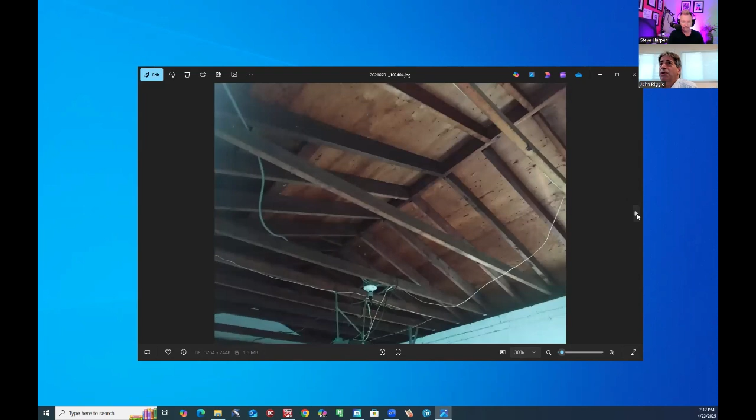And now, in that challenge, I'm just curious, John, was there any way to get a variance for that from the town? I mean, sometimes you have to pay something for it. Was there any way to get around that, or it wasn't even a goal for you and the homeowners? Well, the borough here is sort of strict with the setbacks, and on this particular project, they didn't allow any variance at all. There were only some things as we went through the architectural review on the house that they might have allowed, but almost all the setbacks are within the new standards they have.

So this house overall started off as an idea of an addition, and as the job got bigger and bigger, the whole house is considered really a new house. It goes under the new code.

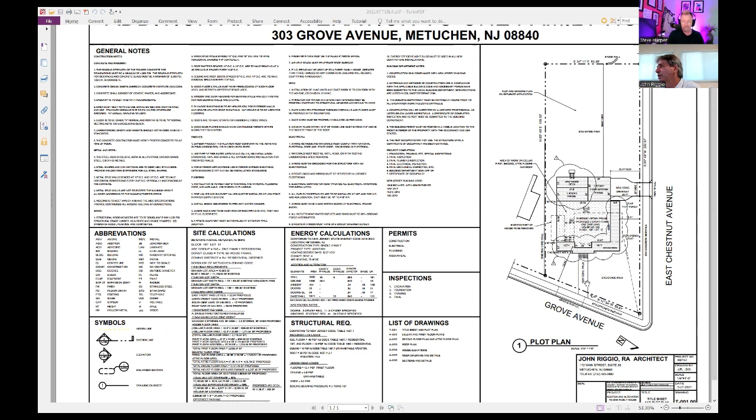I went through a number of designs, and here in the Borough of Metuchen, since the project went past a certain percentage - over 50% - it started to be considered a new house. So all the things with the setbacks, I think on the title sheet you can see the plot plan, and if you look at the plot plan here, you can see that the existing garage was too close to the side yard.

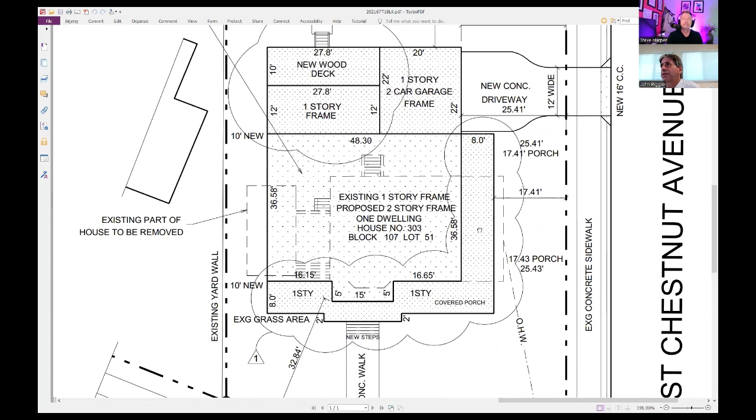And also the existing brick addition on this side of the house over here was also too close. So to bring this within the requirements of the zoning code here, the small addition had to get removed. The old garage and breezeway are completely removed, and the foundation area - the rest of it is in use, but we added on to the overall size of the house.

This front area that's shaded in is one interesting feature of the zoning code here, and that is a covered porch. This gives you an extra 8 feet within the setback of the front yard, and you can also utilize that space. So that's one bonus they have here. There's a requirement of keeping the garage behind the line of the porch. So the idea is you use the porch, keep the garage to the back, 8 feet behind the line of the covered porch, and that meets the zoning code here. There was plenty of room in the back of this property - it was very large.

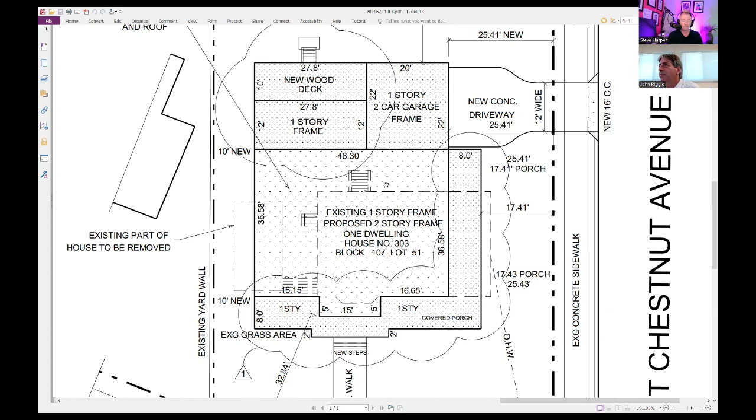And from there, we added a couple additions. One was to add a two-car garage with a new driveway, and an addition to have a larger kitchen area, which I'll show in the pictures, and then a wood deck too - so there's a very nice wood deck there. And then in the front of the house, we made an entrance right from the sidewalk, and the old curb cut for the garage and everything is completely removed.

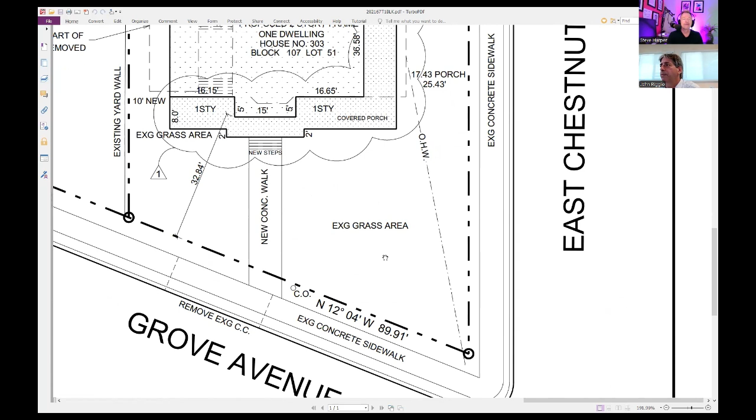So, John, I want to ask, looking at these plans - they're fantastic, so much detail, very easy to read.

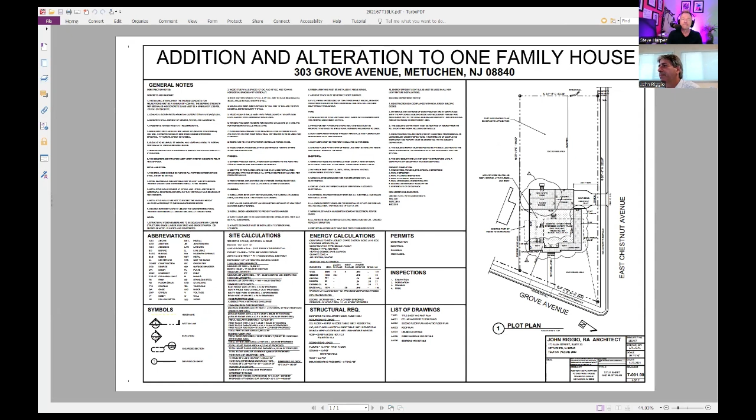There's sort of a best description, like clouds, a drawing of a cloud, circles around certain things, like the front of the house and the back of the house. Oh yes, those are revisions as the house was constructed. Small adjustments were made to the property, and I put them on a revision.

So that's to call your attention to a revision, and the revisions you're talking about are the ones made to your modifications. Yes. Gotcha, okay, interesting.

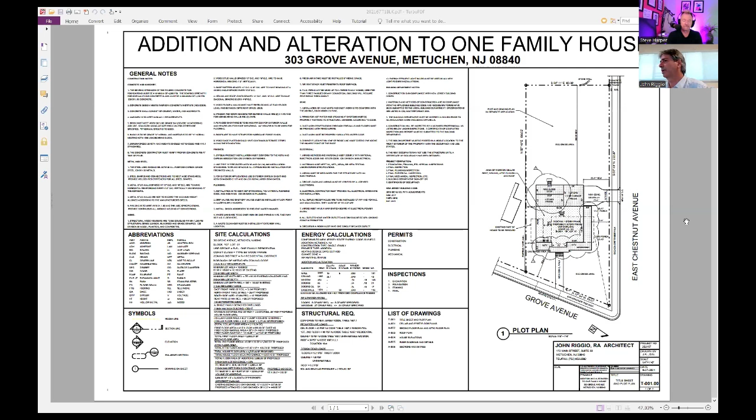From this, let me get the next sheet of paper on this here. Let me just get it on this sheet. Okay good, so this is screen one. Let me see if I can get the next drawing on here. I have to open up that file again, takes two seconds to do. I'm gonna go in and get the folder for this. So the drawings consist of seven drawings, and I'll get the floor plans in a minute.

How long did it take in total time to do the full renovation to add the upstairs? Really, the initial renovation of the house took about a year's time.

But I think some of the things on this particular job were, okay I loaded up the different things, were that this had to go through some reviews from the borough. So there were some delays, it couldn't get approved right away, it took some time to go through them.

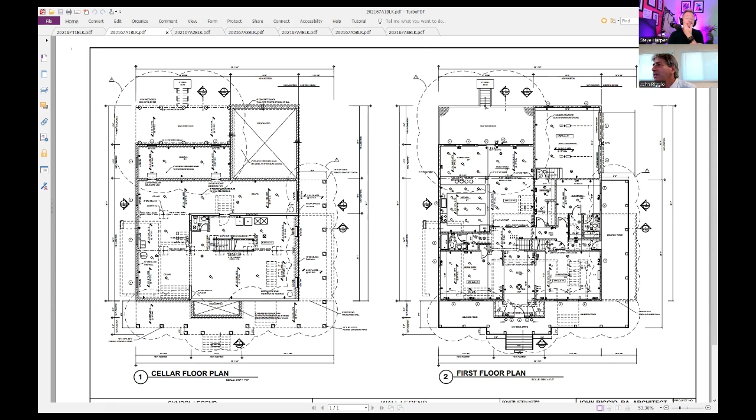As you walk through, you go to the right side of the living room, then you could go around that stair. The stair goes side to side, one goes down to the cellar, one goes up to the next floor. Let's go to the next one, the second floor. When you go to the landing of the second floor, you see you have this hall that goes right around the whole stair, and you look into the double height space for the entrance.

You have here one, two, three bedrooms, plus a fourth bedroom, and they share two bathrooms. Then we have a washroom in the middle of the floor, and we have a master bedroom with walk-in closets and a bath to the rear of the house. So everything is on here.

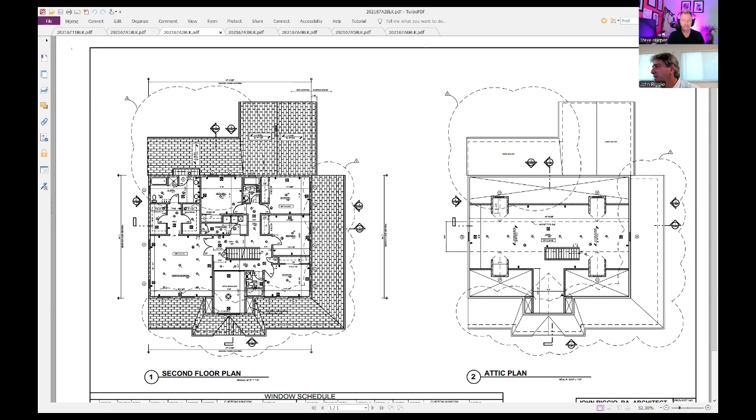Then this has a very nice attic space too. From there, you can walk up that stair again going up to the attic, and it has a stair with some nice windows in it. I have some pictures of the attic, it's somewhat a large attic, it came out nice and clean. Let me just bring this here, sorry, the drawing. So then from there we have the roof plan, which shows a basic roof.

Now what's happening here is that the new houses also have to look what they would call colonialish, a colonial style, of course using new materials.

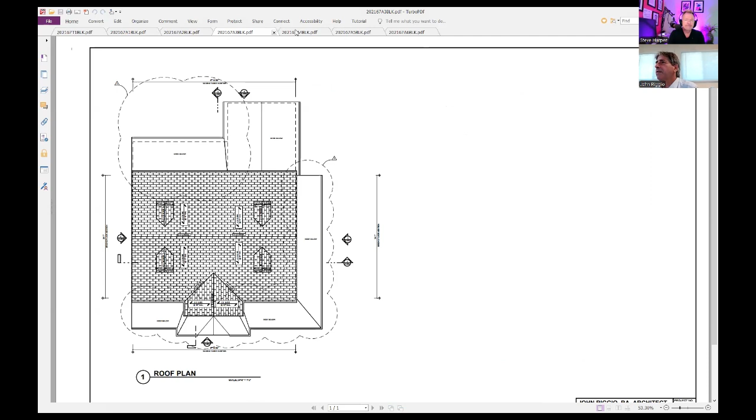And then the next one is the elevation, so this is the elevations of the house. Let me just zoom out a little.

This is the first time I've gotten a chance to look at the renovation. Oh my gosh, I would have never imagined you turned what we looked at previously into this. So this was just a small one-story house that had the breezeway and the garage, and it's completely transformed now. It's a very large house with a lot of nice features. It looks really good.

And from the drawings, they matched what was constructed. Everything is on here, the covered porch, the details with the windows, everything like that. So let me go to the next drawing.

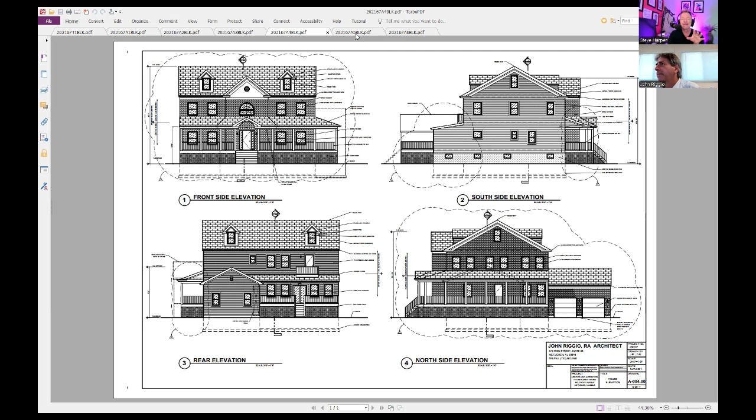What style would you say this is? This is just some details, it's a colonialish style, a colonial style. What's going on with the colonial style is that the outside of the house is mostly meeting the requirements of a colonialish style, and the inside of the house is still keeping a lot of contemporary features.

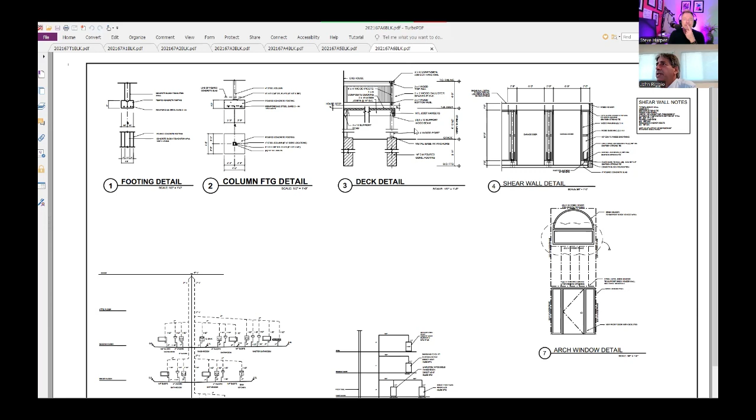The contemporary features, what I'm told, are more valuable. A standard colonial style house doesn't have as much value today as a contemporary style house, so the contemporary style has a lot more value. We kept all the contemporary styles we've been doing in most houses, and as far as the outside look, kept it colonialish. I think some added features like windows on the roofs made the attic a little brighter. I'll show you those in a minute.

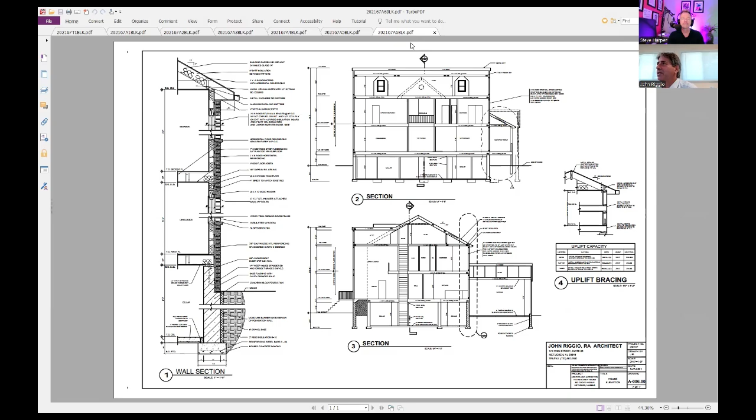So let me close this and get to the next picture, some photographs. Okay, so this is here. I have two sets of photographs, some of them are with a video, some are still photographs. Let's go through this and see which ones these are.

Okay, this is a video, showing starting from the master bedroom. Love the freestanding tub. Let's go to the next one, which is a little longer.

This is a 3-minute video on the next one. Now it's showing the bathroom, see the very nice marble tile there, molded doors, nice closet size.

Yes, this whole house has a completely new air system for the whole house, and that usually involves two units, one in the attic, one in the cellar floor.

And this is going through the double doors going into the master bedroom. You walk around, this is that walk around the stair I explained. You see the chandelier there, the double doors, the arch window. It looks really good, it's a very large house.

Is that part of what you call a contemporary style? Yes, it is. And this here going through the bedroom here.

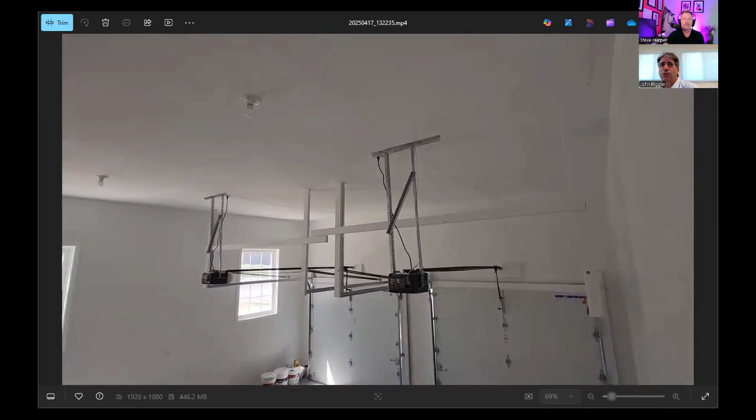Walking over to where the garage is. Now we're heading to that space there—you could put some clothes hangers or things like that, or make amazing custom wood shelving in there. This is the two-car garage, very large, with a nice high ceiling and two windows.

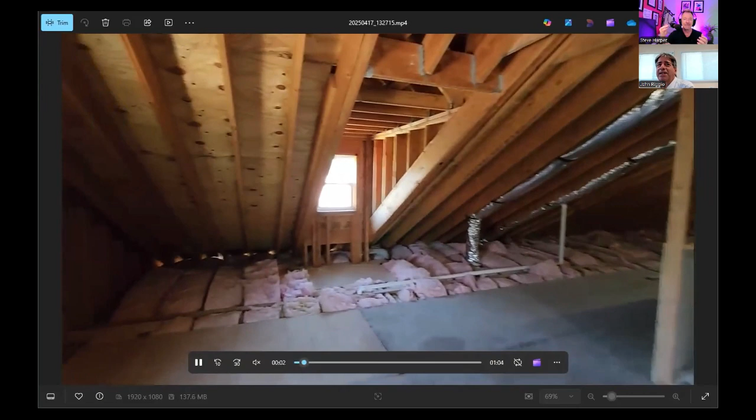This is the attic, with those small dog house windows that are on the roof. And I'm showing the structure—we have all the hurricane straps, the joist hangers are there, and the tie wood bracing is there.

Now this is the second mechanical unit for the top floor, shown here on the right side. This came out as a very nice, clean, open attic space, so they could use this for storage.

This is key, coming from the experience of a one story that was turned into a two story. A lot of times the attic suffers, and you have to squeeze in all the air conditioning and everything because you're reconfiguring the house. You nailed it with so much space up in that attic. I remember when my attic was added to a one story, there wasn't a lot of space up there—you'd fight every time you walked along the rafters. This is amazing, wow.

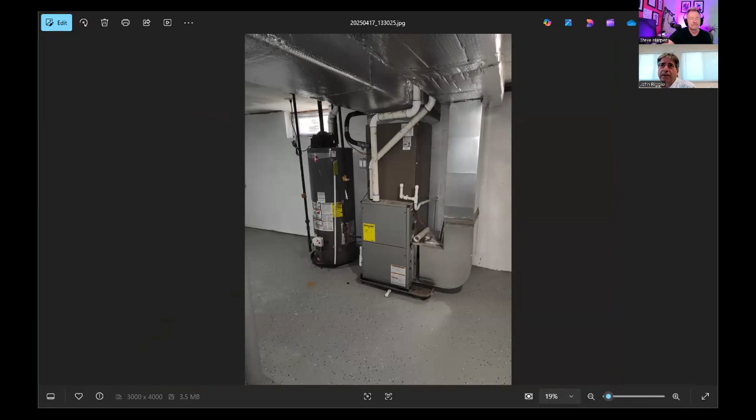This has the vent going towards the rear, and this is the other heating unit—brand new direct vent, no more chimney, new hot water heater. This one they went with the tank hot water heater that is high efficiency. And this has two drains instead of just one, so we added a drain.